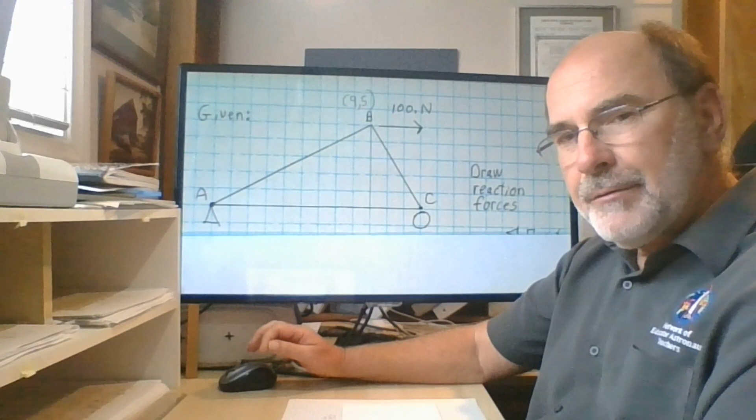A truss is a triangular shape, and this is a simple one that I've drawn here. I've chosen to draw it on graph paper. It's convenient, and there's a trick you can use when you have a truss structure drawn on graph paper. As I work through this, that should become apparent to you how that's helpful.

To describe it, a truss is a massless rod. It can only pull or push in the direction that it's drawn, so it can't pull or push to the side. I have here a simple truss, one triangle. I've labeled the left vertex A, the top one B, the right one C.

This triangle that I drew underneath vertex A is the symbol that represents that it's pinned at that point. That means it can rotate, the structure can rotate about point A, but it can't translate, it can't slide left or right, and it can't go up or down. It's pinned in place. Underneath vertex C, I've drawn the symbol for a roller, a circle.

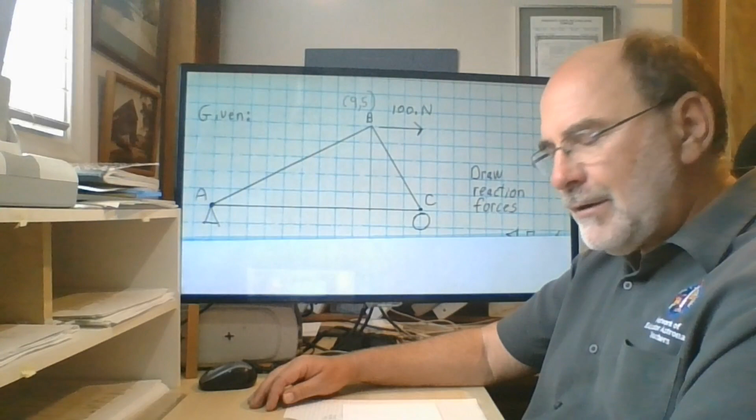That means, like it sounds, that it's sitting on a wheel, that it's not pinned, it's free to slide left and right.

So, what I've done is I just made up this problem and I said, suppose I have a 100 Newton force being applied horizontally to the right at vertex B up here.

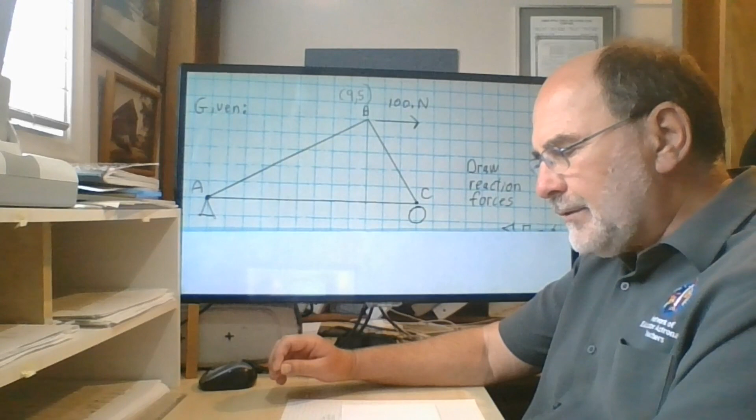The first step you have to do in a truss structure is to draw the reaction forces. Those are all the forces on the outside of this truss acting on it as a single structure. Later on, you'll be asked to analyze the compression and tension for each member, but first things first, you have to do the reaction forces.

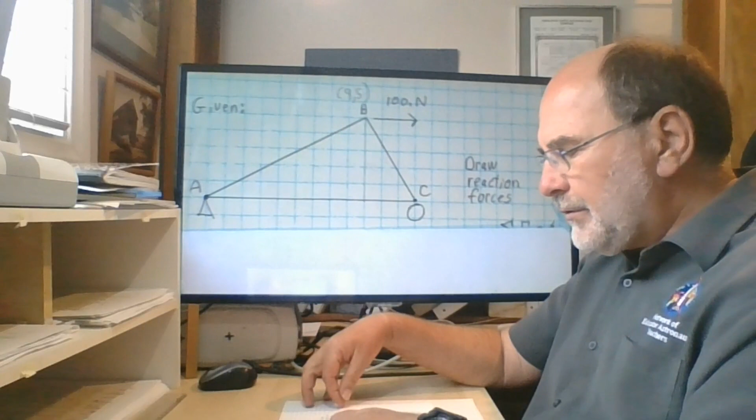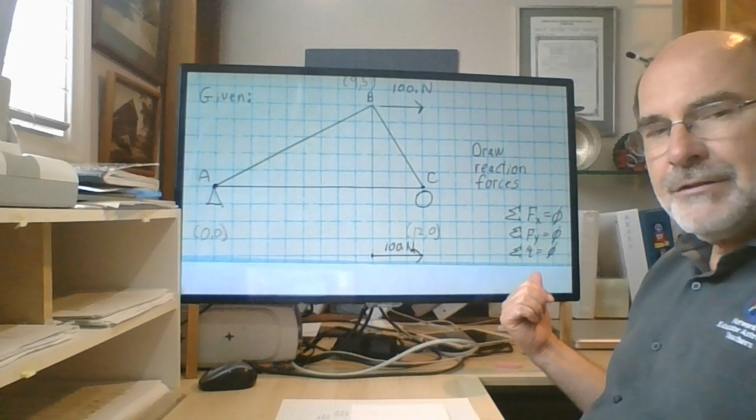There are three guiding statements about the reaction forces. The sum of all the forces in the horizontal direction have to add up to zero. The sum of all the forces in the vertical direction also have to add up to zero. And the sum of all the moments, or as I call it, the torques, about any arbitrary axis also have to add up to zero.

Because I chose to do this on graph paper, I've laid out a coordinate system with the origin at vertex A, so its coordinates are 0, 0. Vertex B is 9 squares to the right and 5 squares up, so its coordinates are 9, comma 5. And vertex C is 12 units to the right and 0 units up, so its coordinates are 12, comma 0. Those are the coordinates I jotted down.

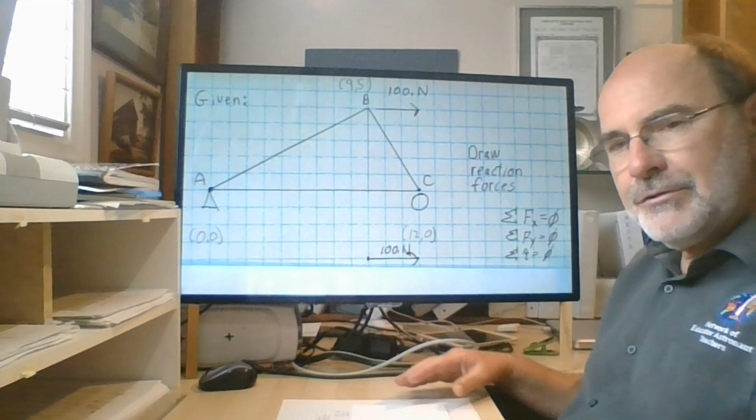Now, applying these rules to this structure to come up with the reaction forces, I've just redrawn the triangle only with the vertices shown right now, maybe trying to make it a little clearer how I come up with the reaction forces. So there's a load being applied to the right at point B that has a magnitude of 100 newtons.

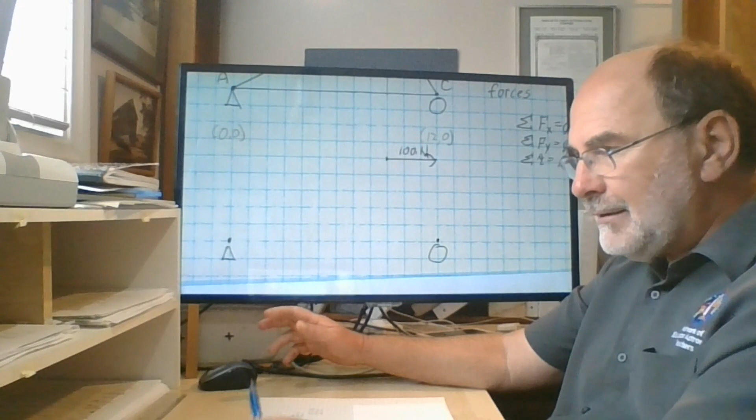I can't cancel that at point C, because if I pull on C, it's actually going to roll to the right. It's free to move horizontally left and right, so it's not going to be resisting any kind of force applied to it there.

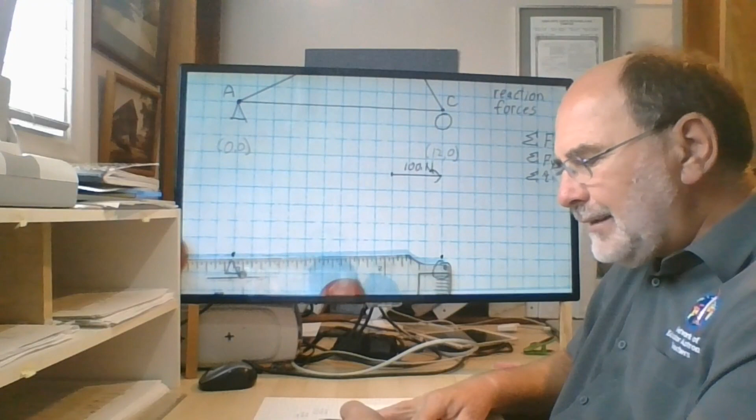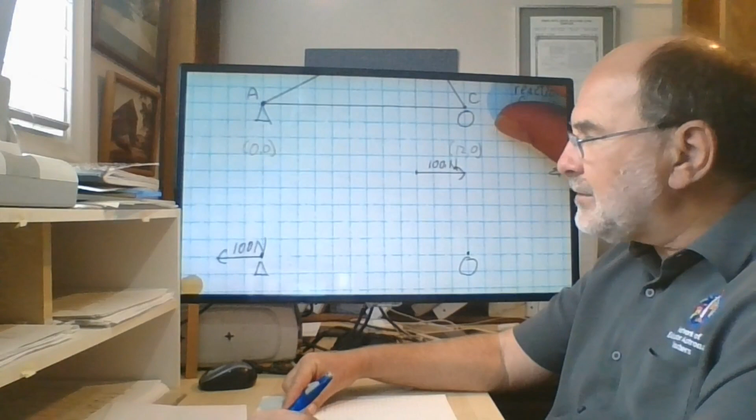The only place where I can cancel this 100 Newton force to the right is at point A. And so therefore, at point A, there has to be a reaction force to the left in the amount of 100 newtons. So there it goes. 100 newtons is the reaction force at A in the horizontal direction, going to the left. You might label that as reaction force A horizontal direction equals negative 100 newtons as far as notation goes.

But wait, there's more. Even though you don't see any vertical forces being drawn here, there are vertical forces here. And they come about in order to keep this thing from rotating about point A.

So if I take this protractor and pretend that it is the truss structure for a moment, and if it's free to rotate, when I apply a force off to the right, it's going to tend to make this thing want to rotate about point A. And so I have to account for that. That is a torque calculation or a moment calculation.

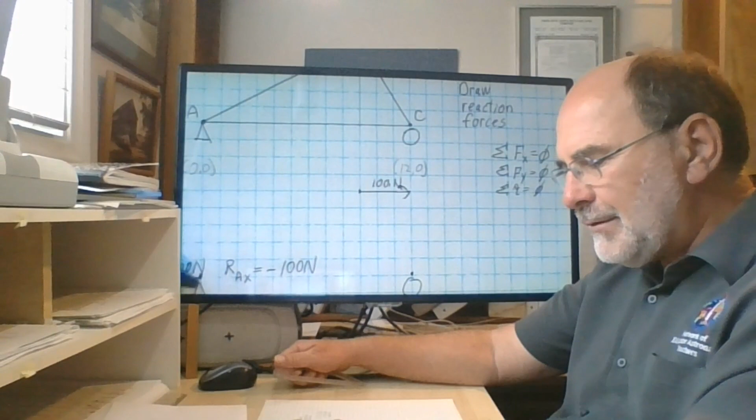Torque or moment is the product of the distance from the axis of rotation to the point of application of the force, times the magnitude of the force, times the sine of the angle between those two directions.

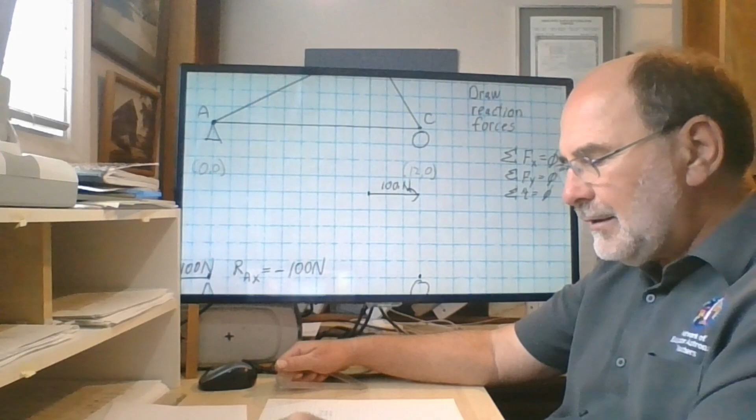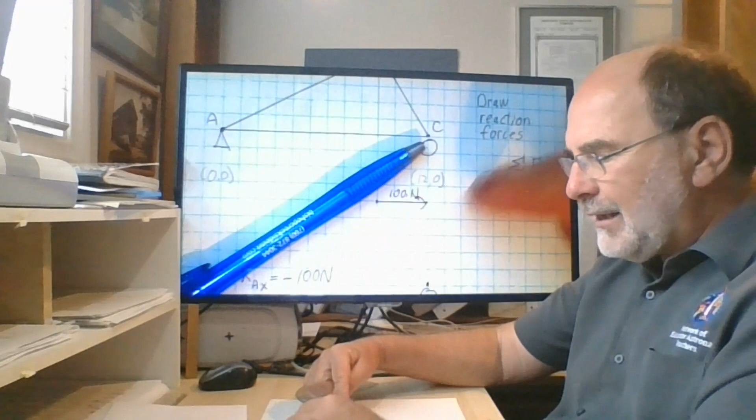Now, in this situation, you could pull out some trig and say, okay, this is at coordinate 9 comma 5, and therefore the inverse tangent of 5 over 9 gives us the angle that it makes above the horizontal.

That will be the angle that it makes relative to the force up here. You could do that, but here's a trick you can use, and it's one of the nice tricks when you do this on graph paper: you are allowed to slide the force along its line of action.

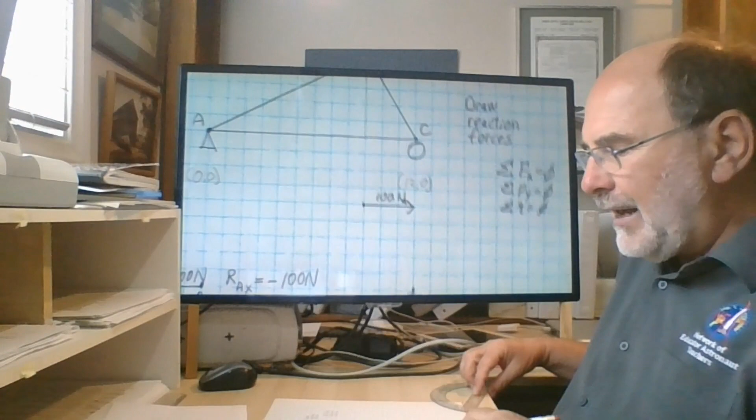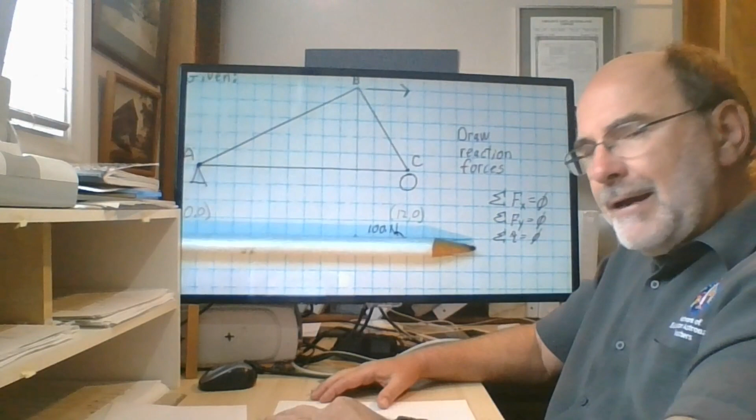The line of action is a dashed line that points in the direction of that force, and it extends behind it and in front of it. So here I've crudely drawn a dashed line, which you can't really see too well. But mathematically, I can slide this force forward or backward along that line, and it doesn't change the moment or the torque caused by that force.

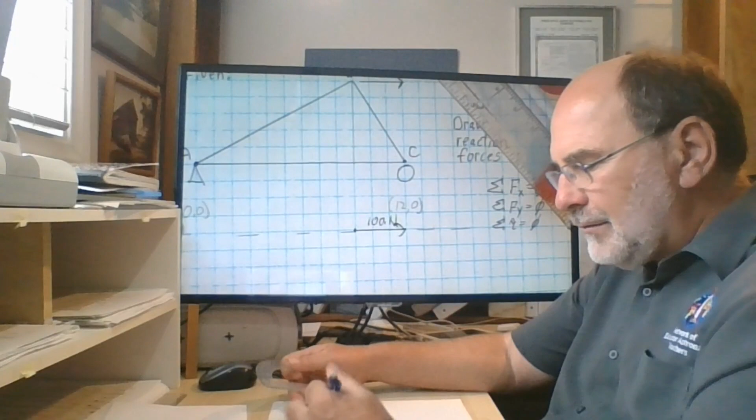So what I'm going to choose to do is back that force up along its line of action until it is directly above point A. I'm going to draw it here, pointing to the right, and label it as 100 newtons.

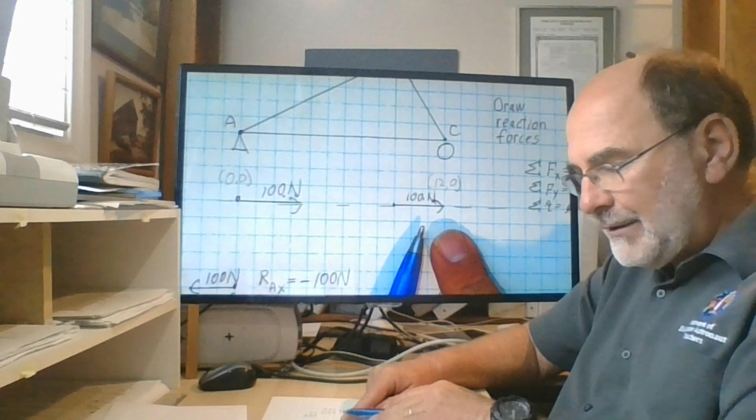That's not a different force from this one, because a force isn't a starting point. A force is a magnitude and a direction, not a starting point. So this 100 Newton force is this same 100 Newton force here, now that I've backed it up to that point. There aren't 200 Newtons going on here—I've relocated this 100 Newton force to be directly above point A.

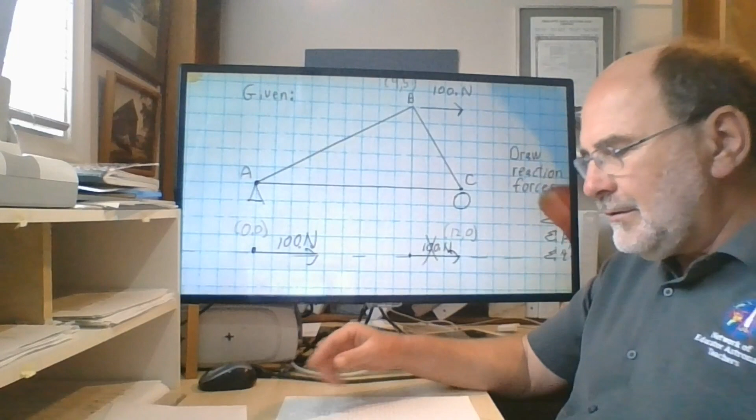The advantage of that is now I don't even need a calculator, because the direction from point A to the force that is directly overhead is straight up. Sorry you're having trouble seeing the contrast here—I suppose I could try darkening it. Straight up, and that is my 0-degree direction for doing a moment calculation.

It's measured from the axis of rotation to the point of application of the force. So this pen right now is pointing straight up. The direction of the force is to the right, it's horizontal. And so the angle between the pen and the pencil is negative 90 degrees.

Because we're always working in the math circle, when we're going clockwise, it's a negative angle; when we're going counterclockwise, it's a positive angle. The sine of negative 90 degrees is negative 1. So very conveniently, the torque caused by this 100 Newton force being applied at point B is 5 times 100 times negative 1. The torque is negative 500 Newton meters.

I'm going to presume that every square here is a unit of 1 meter and that my force is in units of newtons, and therefore my torque is negative 500 Newton meters.

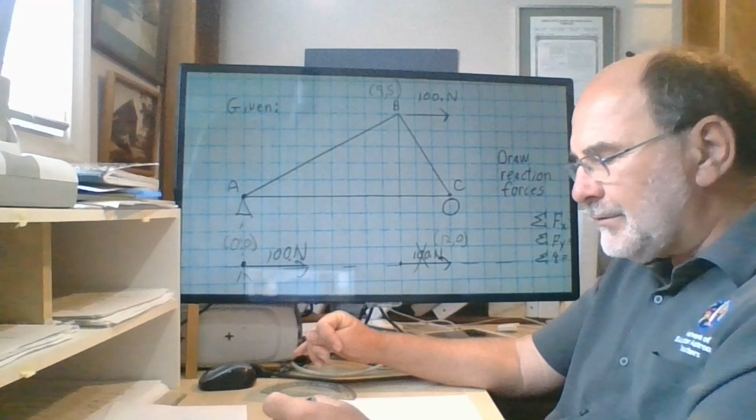Excellent. Well, that will cause this whole truss to rotate about point A. It has to be counter-torqued someplace. And I can't counter-torque it at A, because the distance from the axis of rotation to A is 0. That would make R 0, and 0 times any force is still 0. So I can't apply a twisting force through point A that has anything other than 0 value.

The only place left is way out here at point C. Point C is 12 units off to the right from point A. And I can't apply a force in a horizontal direction at C—it would just roll on that roller. So the only direction in which I can apply a force at point C is vertically.

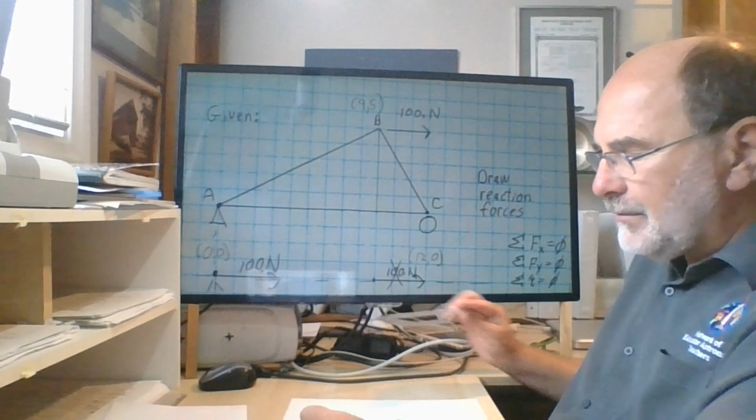And I need to apply a positive torque at point C to counter the negative torque being applied at point B. A positive torque means the direction from A to C, taken as 0 degrees, to the direction of the applied force, has to be a positive direction, going counterclockwise, like on the math circle. So the force at point C, which I'm going to draw down here, must be an upward force.

So I just drew this arrow here. This is point C—here I haven't drawn the triangle, I've merely drawn the three vertices. And I can calculate its force. I'm going to label it reaction force at C in the y direction. It must counter the torque caused by the 100 newtons being applied at point B.

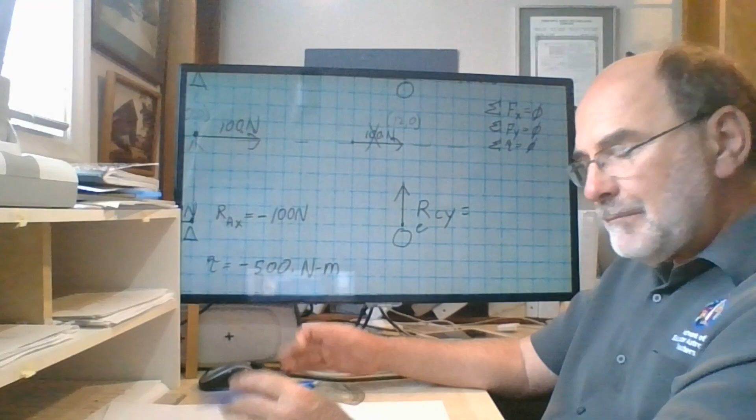Therefore, given that the distance from A to C is 12 meters, and given that it has to have a total torque of positive 500 Newton meters, I would say 500 Newton meters divided by 12 meters must be the magnitude of the reaction force at point C.

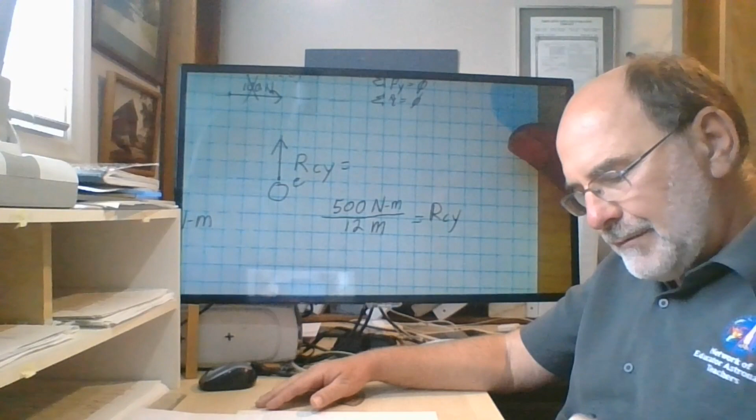So, 500 divided by 12—and it's not a convenient number, but oh well—I get 41.7 newtons. In fact, I'm just going to round it off, and I'm going to call it 42 newtons today.

Maybe I shouldn't, but I'm going to.

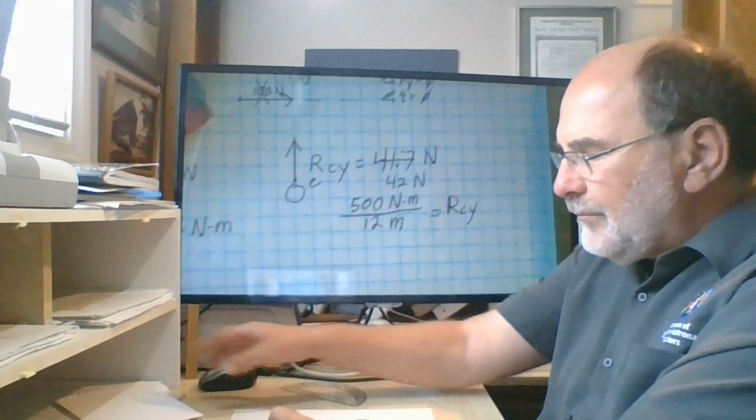That reaction force is pushing up at point C. If I go back to my full triangle, there's really a force pushing up at C, and there's a force pulling A to the left from the wall or pedestal that it's mounted on.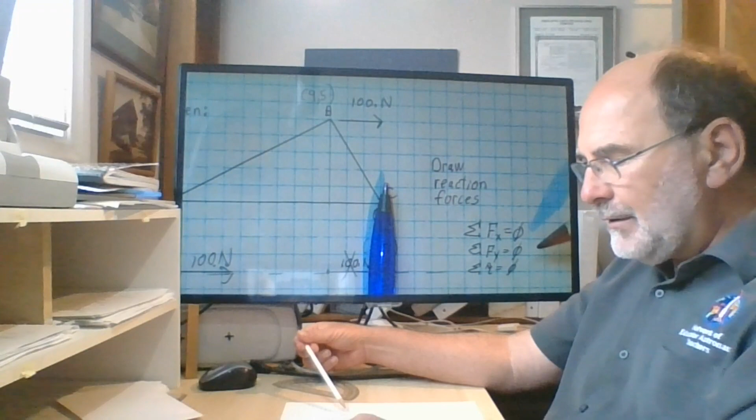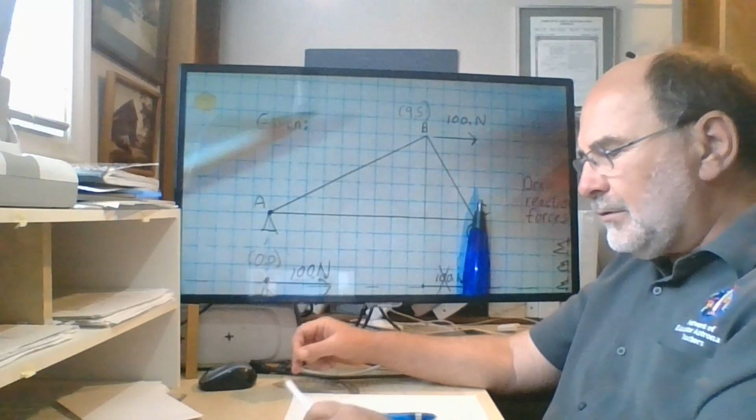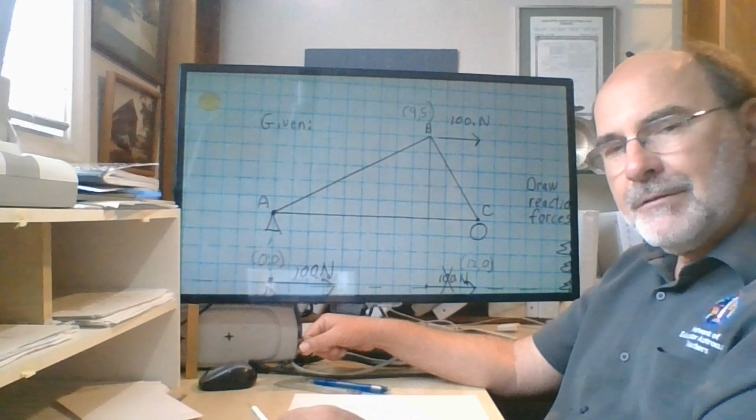We still have to respect the sum of all forces adding up to zero. In the horizontal direction, 100 newtons to the right is canceled by pulling A 100 newtons to the left. In torque, the torque caused by 100 newtons at B twisting around point A is canceled by the 42 newtons at point C going up vertically. Those two torques cancel, but I still have vertical forces to cancel out.

Now that I've created a vertical force where the roller is pushing upwards at point C, there has to be a counter force in the vertical direction to cancel out those 42 newtons up. It can't be at B, it can only take place at A. This pin has to be pulling down on point A with a magnitude of 42 newtons. So I'll draw that in this diagram.

Doesn't really matter which one I'm choosing to write it on, but the reaction force at A in the y direction is negative 42 newtons. Not to scale, but I'm trying to show there's an arrow pointing down at point A. This is the reaction forces acting on the original truss.

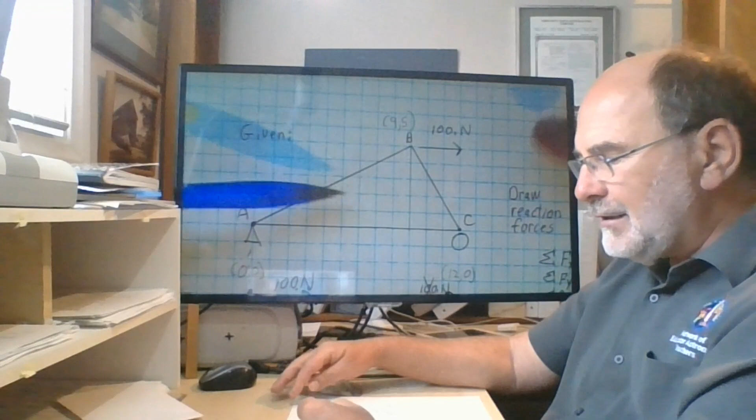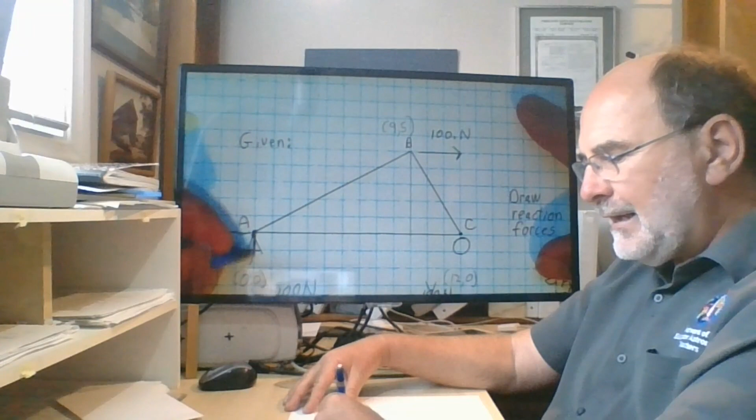So we started with these massless three rods, the dimensions given, the load given, and from that we've determined there is a reaction force at A with a magnitude of 100 newtons, another reaction force at A downward with a magnitude of 42 newtons, and a reaction force at C with a magnitude of 42 newtons.

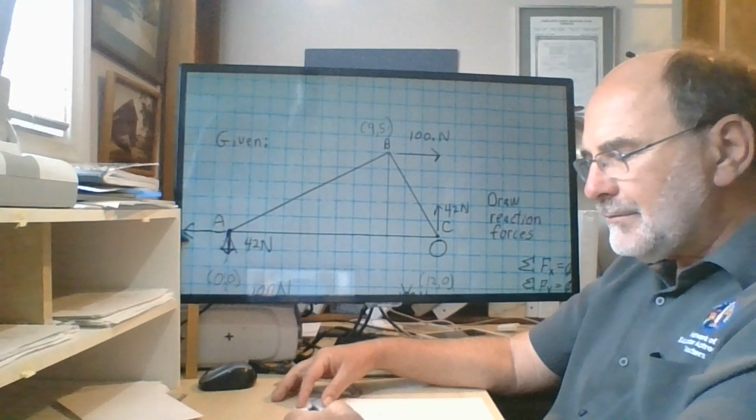This is the first and necessary step to doing truss analysis. You cannot go inside the truss until you have the correct reaction forces drawn acting from outside the truss. So the roller outside is pushing up, the pin here is outside, pulling down and pulling to the left, and the load is outside, pushing or pulling B to the right.

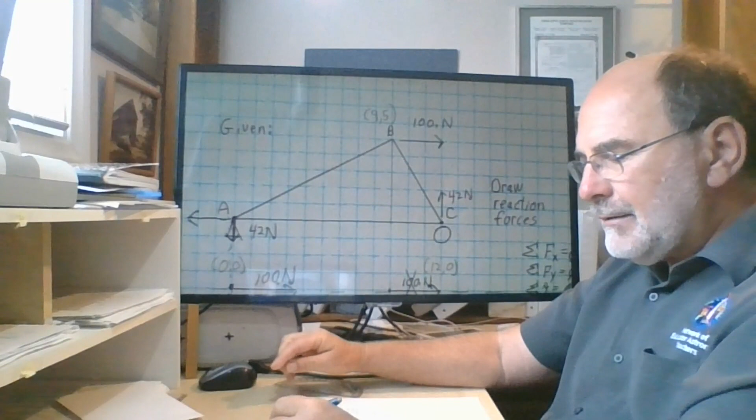Having completed drawing the reaction forces, now we can go inside the truss and calculate the compression or tension for each one of these members. Just like this pen, each member is either being pulled apart or pushed together, that's all they can do. A complete truss analysis is to calculate how much force is being applied to each of these three members. This is the part we did not get to yesterday during the Google Meet.

Of course it's fun to do, and I'm now going to try to do it in real time for you. I'm going to begin my analysis at point C, because in my mind I can see what I need to do there. I want to remind you that at point C there is a force going upward, and I'm going to say it's 42 newtons.

At point C, which is not allowed to move, the sum of all the forces acting on point C have to add up to zero. All we've said so far is that the roller underneath point C must be pushing upward with a force of 42 newtons. Somehow, something must be canceling those 42 newtons.

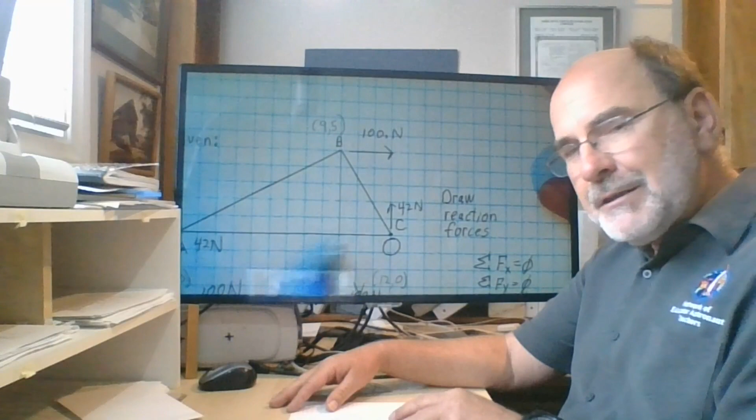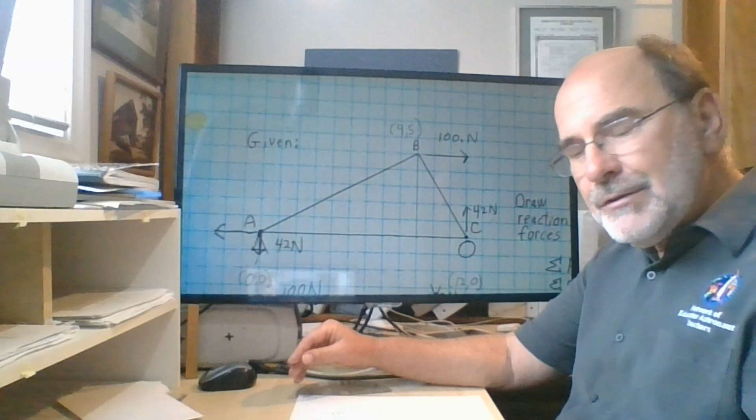Now go back to the original truss structure. Point C has a roller pushing up on it, and it has two truss rods connected to it. A rod can only push or pull in the direction that it's drawn. So this horizontal rod that connects point A to point C can do absolutely nothing about the 42 newtons being exerted on point C upwards in the vertical direction.

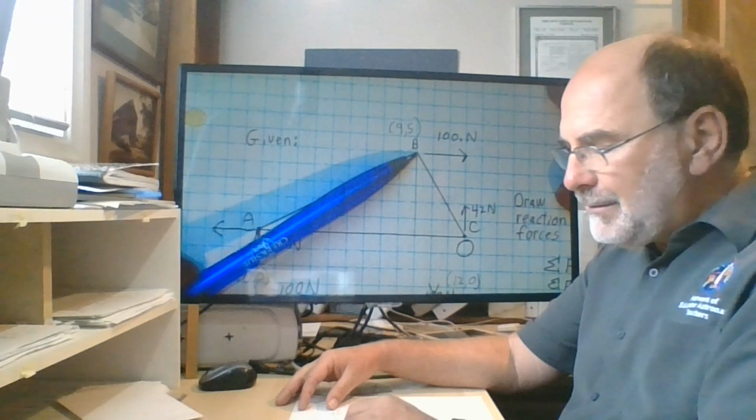There's only one rod that can do anything to counter it, and that's rod BC. BC connects point B to point C, and it can either push or pull. In this situation it has a job to do, and that job is to cancel out the 42 newtons being exerted on point C by the roller. So the only way it can do that is if it's pushing down with a magnitude of 42 newtons.

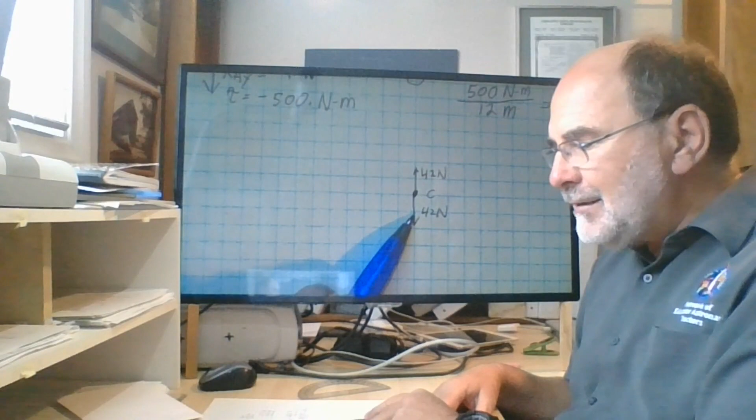So I've just drawn it. Here's this little sketch. This must be coming from rod BC. Now, if I were to do this to scale, what you would see - let's see, this is 3 squares by 5 squares. So if I count 3, 1, 2, 3, 4, 5. So B to C is this rod on the graph paper. I'm drawing just the rod. Here's point B, here's point C.

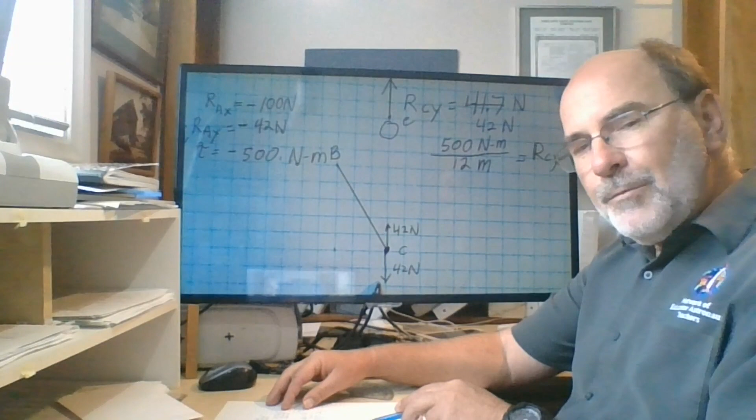The roller is pushing up on point C with 42 newtons, and now rod BC must be pushing down on point C with a magnitude of 42 newtons. But that is the vertical component of a force that must be exerted in the direction of this diagonal line. And so what I'm creating is a right triangle.

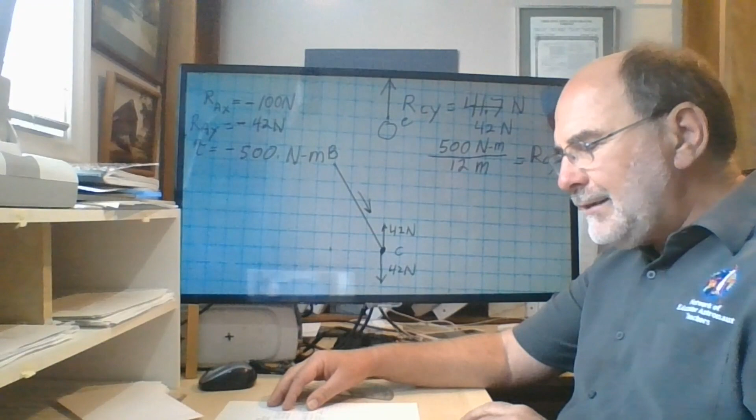This right triangle has one leg of length 5, one leg of length 3 - sorry, you didn't see that - one leg of length 5, one leg of length 3, and in terms not of physical distance, but in terms of magnitudes of forces, the magnitude of this vertical force must be 42 newtons. Okay, not 5 meters, but 42 newtons.

By similar triangles, the ratio of this leg to that leg to the hypotenuse is the same as the ratio of the components of the forces acting on through truss BC. So if this vertical leg is 5 units and this horizontal leg is 3 units, and this vertical leg is 42 newtons, then this horizontal leg must be 3/5 of 42 newtons.

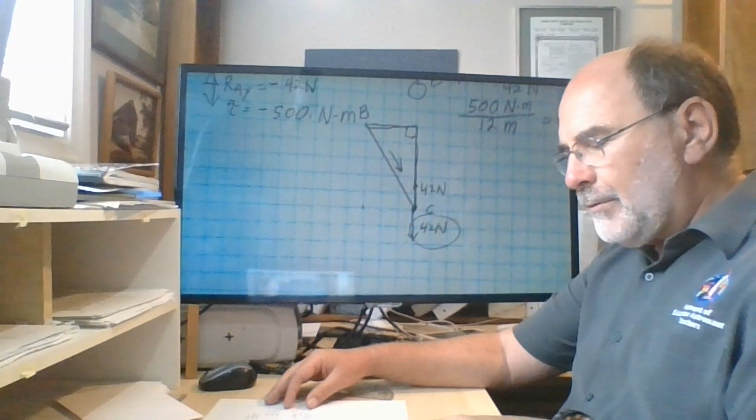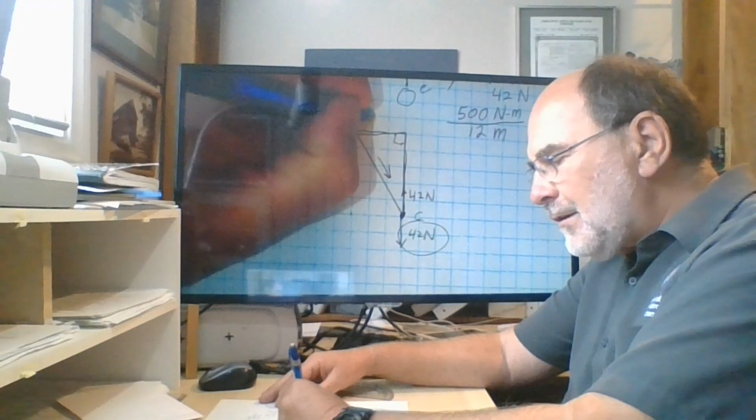Rather than do that in my head, I'm going to use my calculator and then round it. It says 25.2, but I'm going to call it 25 newtons. That is the horizontal component of the force of truss BC acting on point C.

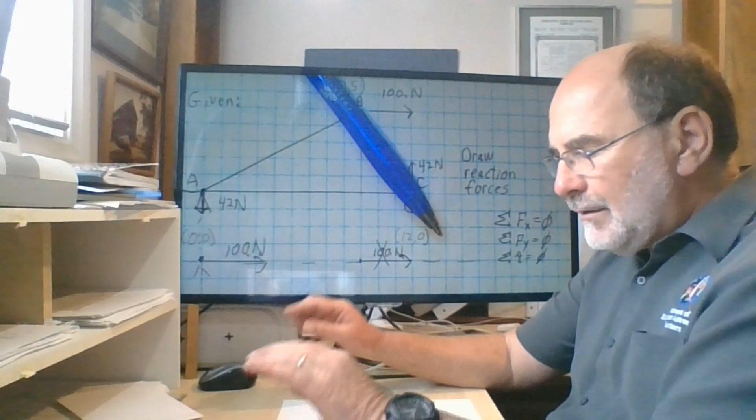This must be pushing down and to the right on point C. The vertical component must be 42 newtons, and the horizontal component must be 25 newtons. And so you can now calculate by Pythagorean's theorem the diagonal.

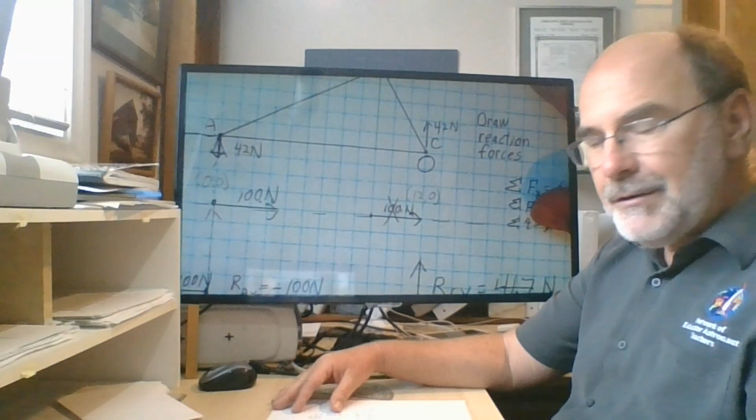I know I rounded off a little bit as we went, but that's what I'm going to do just to get this done quickly. Rounding off, it says 48.9. I'm going to round that off and call it 49 newtons as the magnitude of the force acting between B and C. Now, the last thing I would do is to show...

So if B is pushing on C - I have the pencil here, the eraser is point B and the pencil tip is point C, and B is pushing on C. Well, by Newton's third law, C must be pushing back on B. For every action force, there's an equal and opposite reaction force.

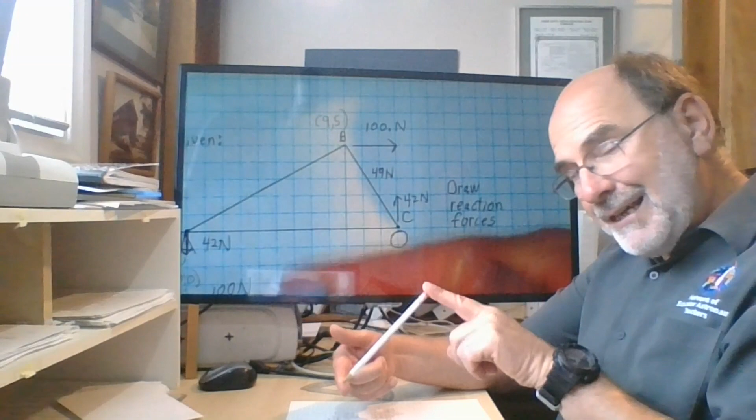So the pencil, my question for you, is it being compressed between B and C, or is it being pulled apart? Am I pulling the pencil apart, or am I squeezing the pencil together? If I'm pulling it apart, that's called tension. If I'm squeezing it together, that's called compression.

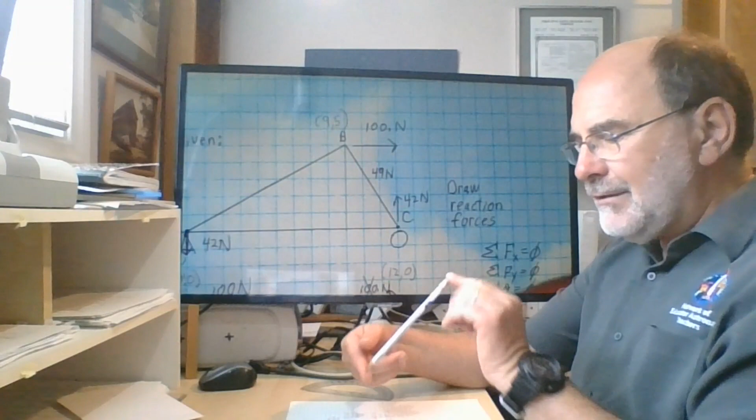In this situation, B is pushing down on C. I suppose I could go like this, right? B is pushing down on C. C is pushing back up on B, and the pencil is being compressed.

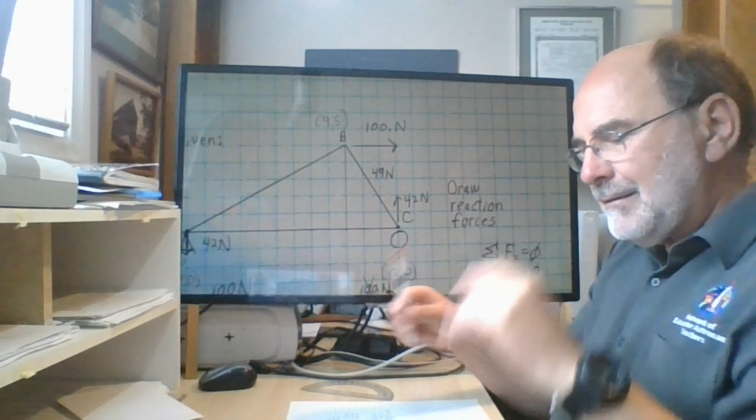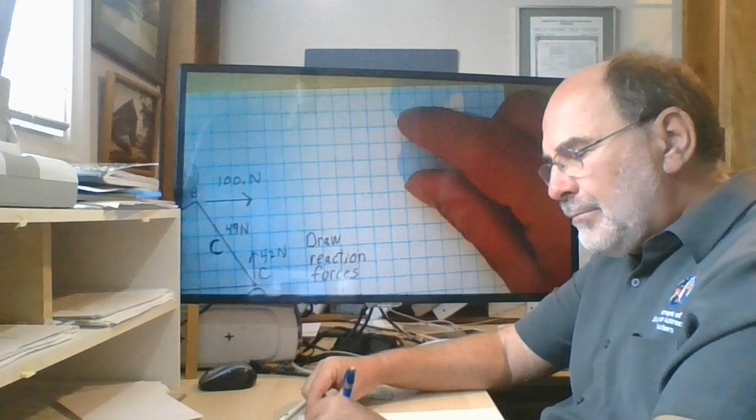So we would normally label this with a letter C, and I myself tend to draw it with arrows pointing from the inside of this truss to the vertices at the two ends of it. So I just added an arrowhead here, an arrowhead there, letter C for compression. So this guy is being squeezed.

And I'm choosing to represent that with these outward facing arrows. If he was being pulled apart, I would reverse the arrows, and that sounds a little backwards, doesn't it? Oh well. Good thing I have the letter C, because even if the arrows don't quite make sense, it's certainly a true statement that this rod is being compressed between B and C.

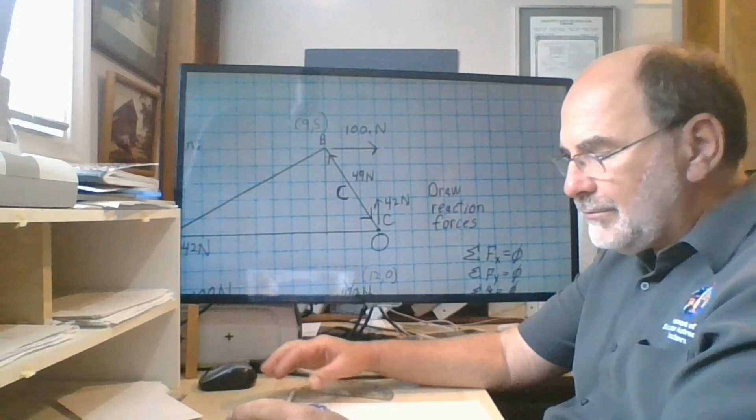All right, that's one of three rods. Now we have to go on and do the other two. The order in which I would choose to do this is actually I would do AC next, is what's coming to my mind.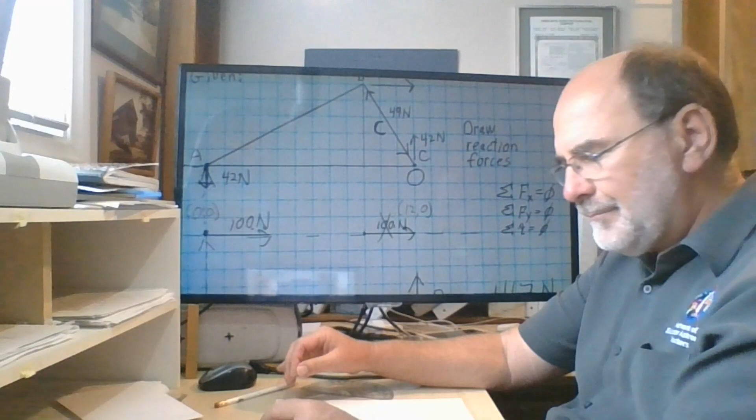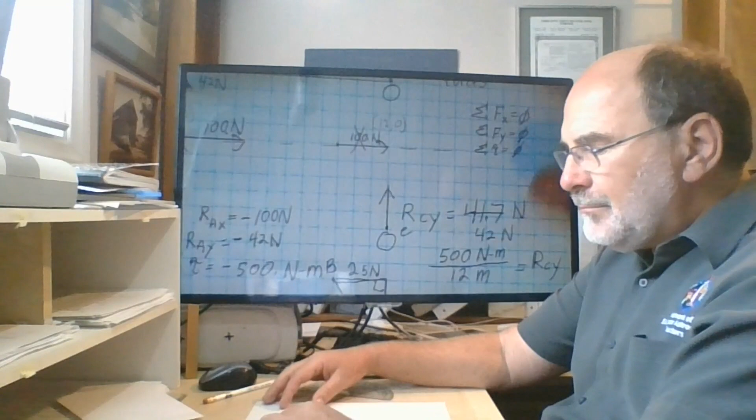Looking at point C, I realize that I have two forces acting on it caused by rod BC, a horizontal force and a vertical force. The horizontal force has a magnitude of 25 newtons. Rod BC is pushing point C to the right with an applied force of 25 newtons.

It would roll, so there must be some force other than the roller that is keeping point C from actually being moved to the right. Rod AC is the only one that can do that. So rod AC must be pulling point C to the left in the amount of 25 newtons.

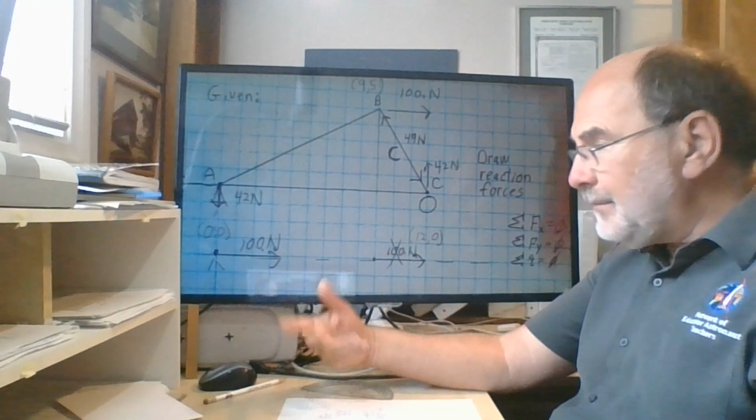So A is pulling C, and by Newton's third law, for every action, there's an equal opposite reaction. Point C is pulling point A, pulling towards each other. It's like a tug of war, and one person on each end is pulling on the rope. So A is pulling C towards A, just as C is pulling A towards C.

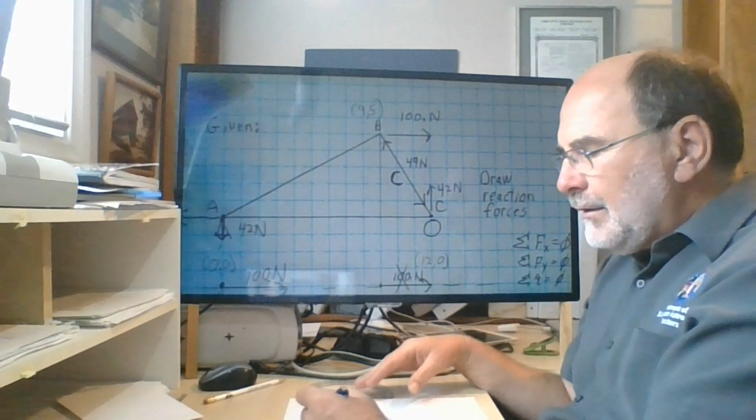Newton's third law. So the reaction force - I shouldn't call it the reaction force - the horizontal force at point C has to have a magnitude of 25 newtons pulling C to the left along rod AC.

And that means, of course, that at point A, if I were to draw just point A by itself, it must have 25 newtons pulling it to the right, caused by C.

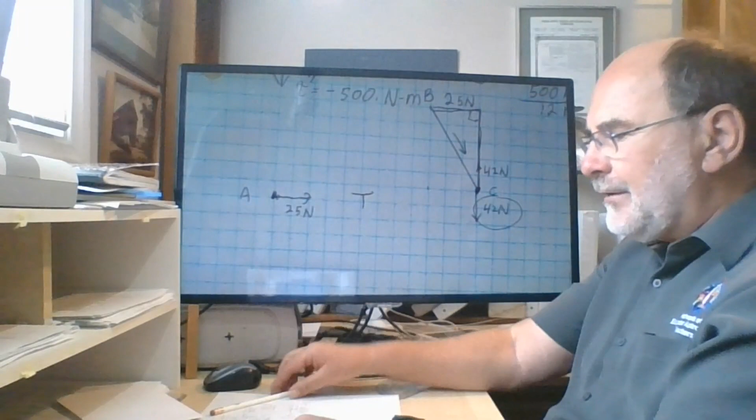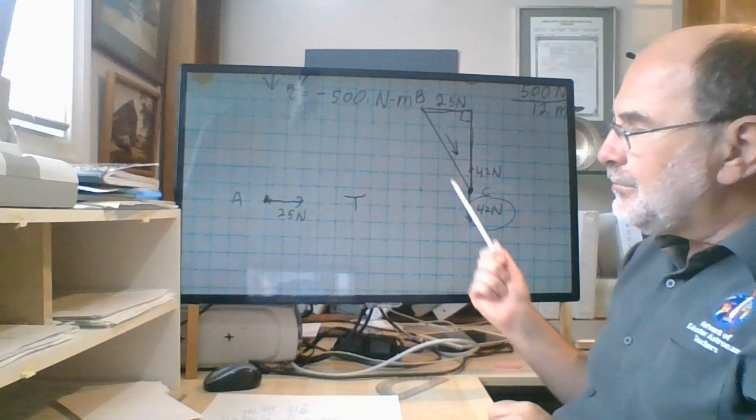I've established what the tension is between A and C. It's a pulling force. If I represent it with the pencil, it could be represented with a rope instead of a bar. I can't represent BC with a rope because you're pushing it, squeezing it together, it would just collapse. But I can use a rope between A and C because it's under tension. So T for tension, and the magnitude of this tension is 25 newtons.

All right, so we still have to do rod AB. We still have to figure that one out. And I see I didn't quite draw this where I should have - I should have drawn point A there as far as this diagram goes. All right, now, you're not done until you do all the truss members. And we still have truss member AB to take care of.

Here's some logic that goes with point B. It's not allowed to move, so all the forces acting on point B have to add up to zero — all the horizontal forces, all the vertical forces. What's going on so far is that rod BC is pushing on point B just as much as rod BC is pushing on point C.

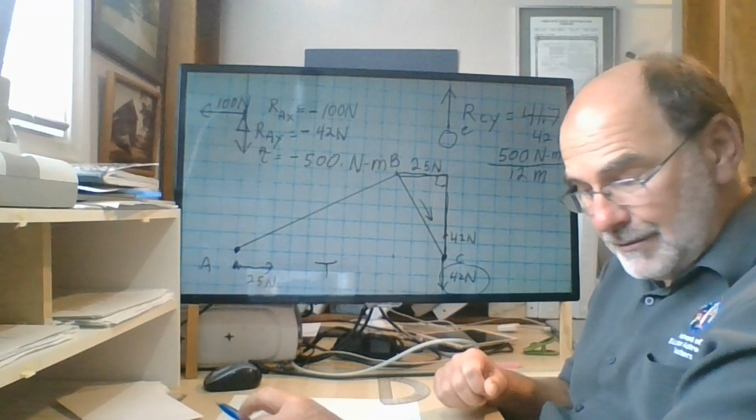If I were to draw just point B by itself, I know that it is being pushed to the left in the amount of 25 newtons by rod BC, and it's being pushed upwards in the amount of 42 newtons, also by rod BC. That is a consequence of Newton's third law. So if B is pushing down and to the right on C, then C is pushing up and to the left on point B — up in the amount of 42 newtons, to the left in the amount of 25 newtons.

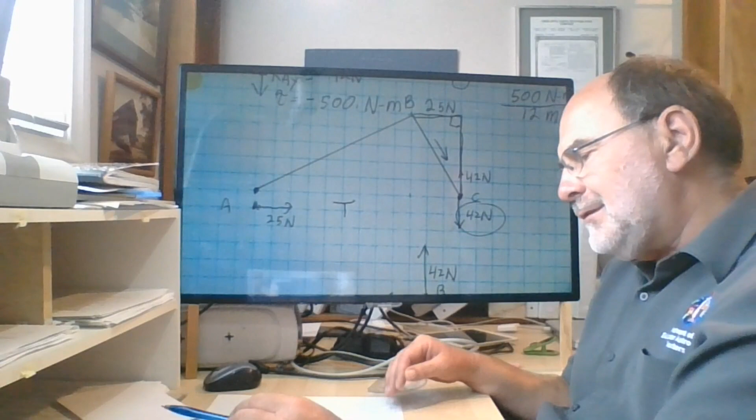Now, point B is not allowed to actually move. The sum of all the forces have to add up to zero. There's only one truss structure that can stop point B from moving, and that is truss AB. So truss AB must be pushing B to the right and simultaneously pulling it down to cancel the stuff all out. So at point B, AB must be pushing to the right and at the same time pulling it down.

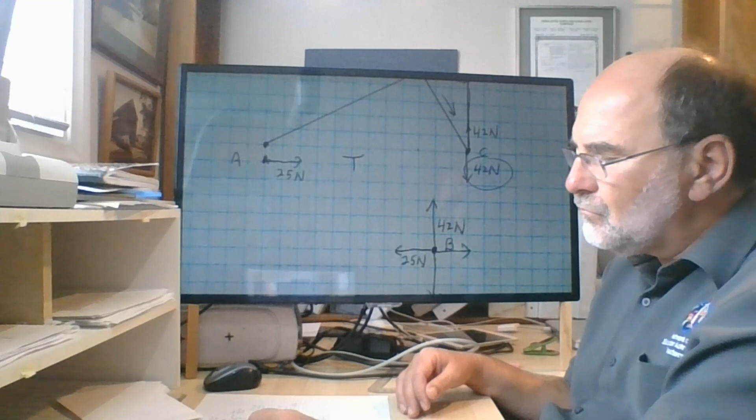That doesn't quite seem to make sense. I'm going to have to pause and think about this for a moment. Probably made a sign error. It seems wrong. The advantage of doing this is I could stop it, and then I paused it and figured out what I was overlooking.

Back on point B here, I was overlooking the fact that there's a load being applied, pushing it to the left in the amount of 100 newtons. Rod AB has to also overcome that 100 Newton load force, not just the two reaction forces from rod BC. So there's really three pushes and pulls going on at point B that has to be compensated by rod AB acting on it.

Here was what I kind of overlooked. At point B, rod BC is pushing up on it in the amount of 42 newtons, and rod BC is pushing to the left in the amount of 25 newtons. So what I had drawn was that rod AB has to be pulling down with 42 newtons and pushing B to the right in the amount of 25 newtons. So what did I forget? I forgot that there is a 100 Newton force, the load, acting on point B.

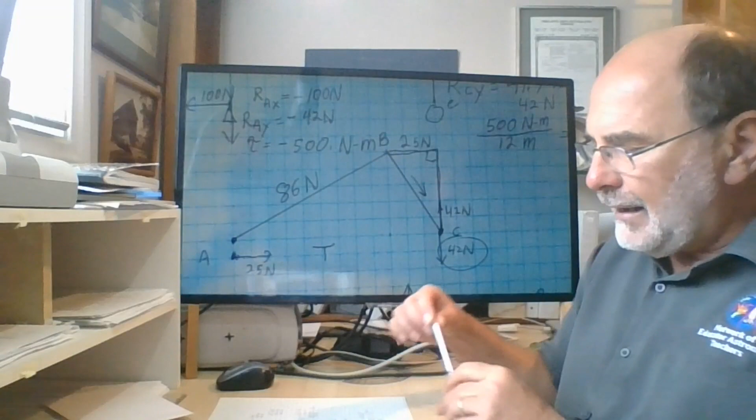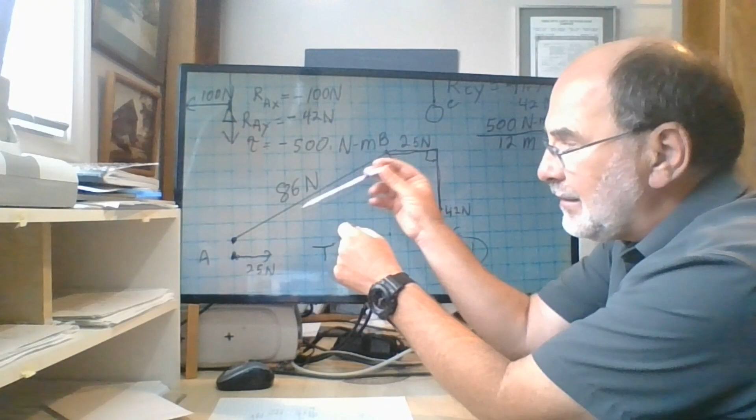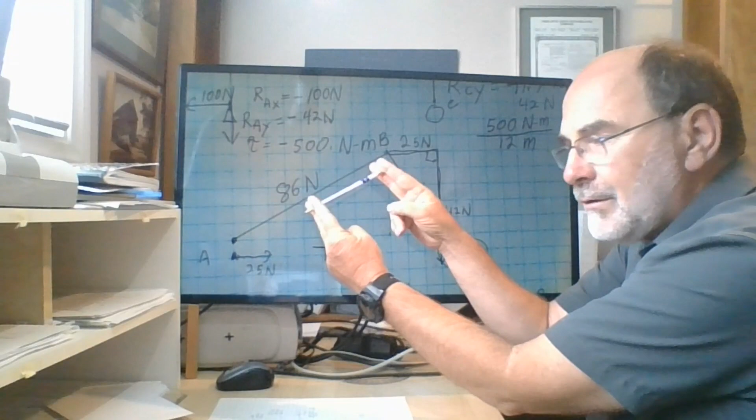And what is it doing — is it compression or is it tension? So A acting on B: if this eraser is point B and the pencil tip is point A, A is pulling point B down and to the left. So conversely, B is pulling A up and to the right. If they're pulling on this pencil, can I represent it with a rope? If I can replace it with a rope, that means this rod is under tension — it's being pulled apart. If the forces cause it to crumple up, then I can't use a rope; I have to use a rigid structure. So A is pulling B, B is pulling A, and you should conclude that you could use a rope in this situation — it's a tug of war, and this particular truss element is under tension.